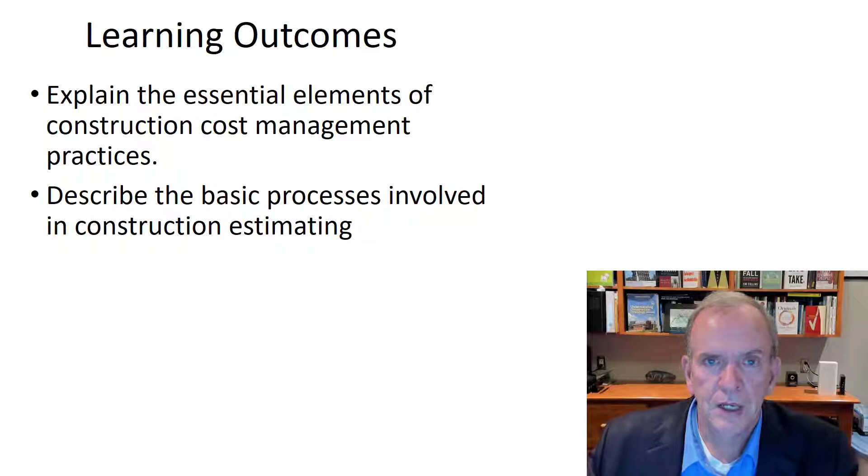Learning outcomes: today we're going to be looking at the essential elements of construction cost management. We'll look at life cycle costing and some of the processes involved in estimating. What's it about, who does it, why do we do it, and what are our concerns about doing it? So capital costs in construction, that's the costs associated with building.

A lot of construction work is development, and development requires land acquisition, which is of fundamental importance if you're going to be successful in the development industry. There's that old saying, build it and they will come. Well, if it's not in the right location, they may not come. That's why you also have the other term: location, location, location.

So we have to look at the land acquisition cost and the cost of constructing buildings. There's two kinds of things there, and deciding highest and best use. We've talked about that in an earlier class. What is the highest and best use for this particular property? If you figure that one out and then build to it, you're likely going to be very successful because you've capitalized on the best use for that particular property.

In other words, if the best use is for it to remain a forest, you leave it alone and don't buy it. If the best use is instead of it being a farm, or downtown Toronto, instead of it being a warehouse like at King and Dufferin, if the highest and best use is to renovate that warehouse into loft condominiums, or to tear it down and make it into Liberty Village, that would be a highest and best use example. So there's all of those kinds of things that go into it.

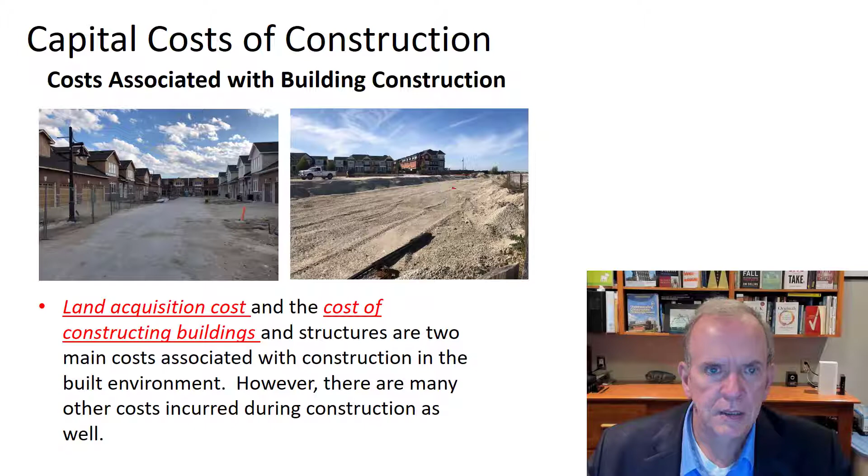Developers usually don't have to think too much about life cycle costing. You build it, you sell it, there's usually a warranty period. In new house construction, it's a 7-year warranty period under the Tarion warranty program, which is mandatory in Ontario. However, in commercial buildings and things like that, it might be a 1 or 2-year warranty.

P3 projects, private-public partnerships, often have it where you design it, build it, and maintain it for 25 or 30 years. Well, I think you're going to design it a little bit different if you're going to be maintaining it for that long.

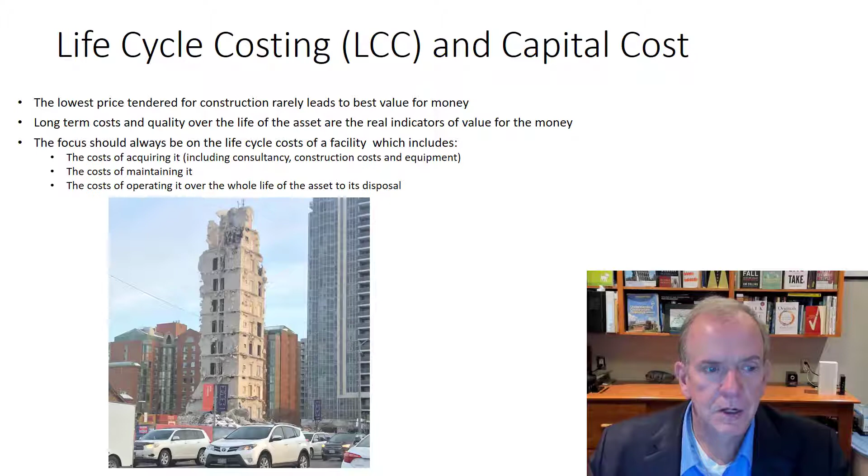So life cycle costing looks at the life cycle cost over its lifetime: the costs of acquiring it, the costs of maintaining it, and the costs of operating it over its whole life. So you're talking about build costs, maintenance costs, operational costs. You can understand that's quite a different sort of number.

Surprisingly, not too surprisingly I guess, construction costs are like this much. And the iceberg that they always say about the Titanic, it's much bigger underneath the water. That's usually how building life cycle costs work.

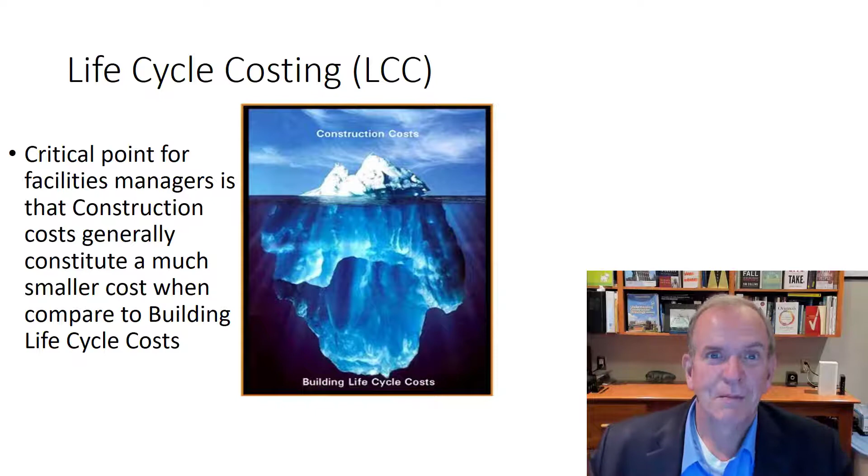In another course I talk about First Canadian Place and the Carrara marble that was falling off of it, falling like 40 floors onto the ground, very dangerous, and they had to reclad the building. It cost more to reclad the building than it cost to build the building. Of course there was inflation and everything involved, but just to give you an idea, it's a pretty hefty cost to maintain buildings.

So the capital costs: initial cost, land acquisition as mentioned, construction costs, materials, equipment, all of these line items you can see here: project management, supervision, testing and inspections, costs for regulatory authorities, permits, feasibility studies, design fees, financing costs, costs of bonds and insurance—we'll talk about that in the second lecture—and costs of equipment and furnishing for building fit-ups. There are other costs in between those too. It's a pretty large area we have to consider when constructing a project.

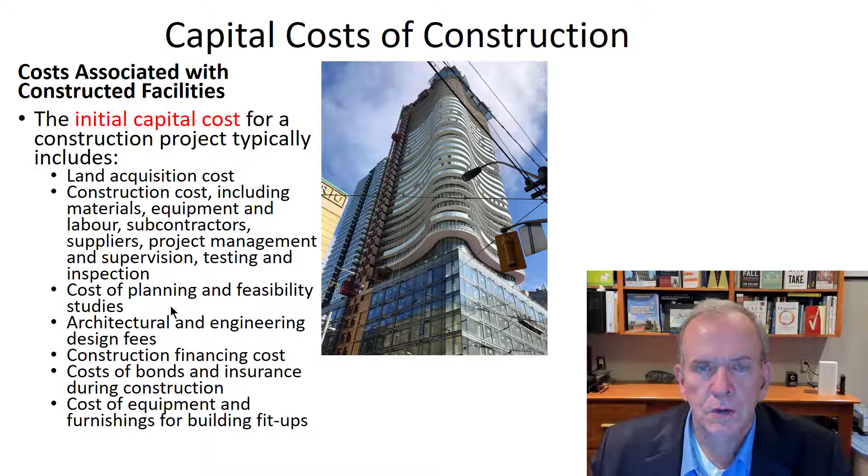Like demolition costs, I don't see demolition costs there. I could sit here and round out a few more of them pretty easily. And that's construction—there's a lot of costs involved. So you have to really look at things carefully as a developer to make sure you've got your P's and Q's in order, that you don't have any surprises, or at least none you didn't have contingency allowances for.

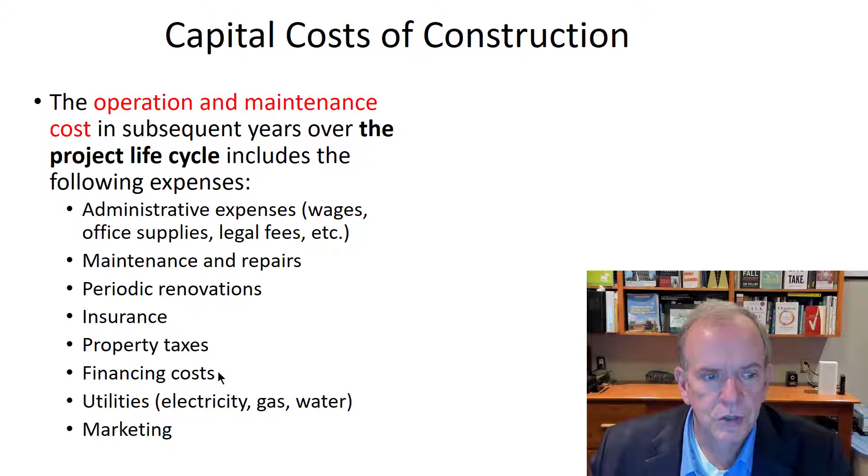For operation and maintenance, some of the line items here: periodic renovations, insurance, property tax, finance costs, utilities, marketing, and a number of others. Design professionals and construction managers realize that while construction costs may be the single largest component of the capital costs, other cost components are not insignificant.

Land acquisition, well in Toronto, land acquisition can easily be more than the building cost itself. In some cases, that's why you'll see people like my mother-in-law say, oh, they tore down this house, somebody paid $1.6 million for this house and they tore it down, are they crazy? Well, it's the property that's worth 1.6 million, not the house.

The house is actually kind of an inconvenience that it's there. So highest and best use is we get rid of this little bungalow and put up a 4,000 square foot house, and maybe it costs $300 a square foot. That would be 1.2 million for 4,000 square feet, and we paid 1.6 million for the property, so that's 1.6 plus 1.2, that's 2.8 million, and maybe we sell it for 3.4 or 3.5 million, making a tidy little profit.

And what was more expensive? In that case, the land was more expensive. So that can easily happen, with very large costs that can be involved.

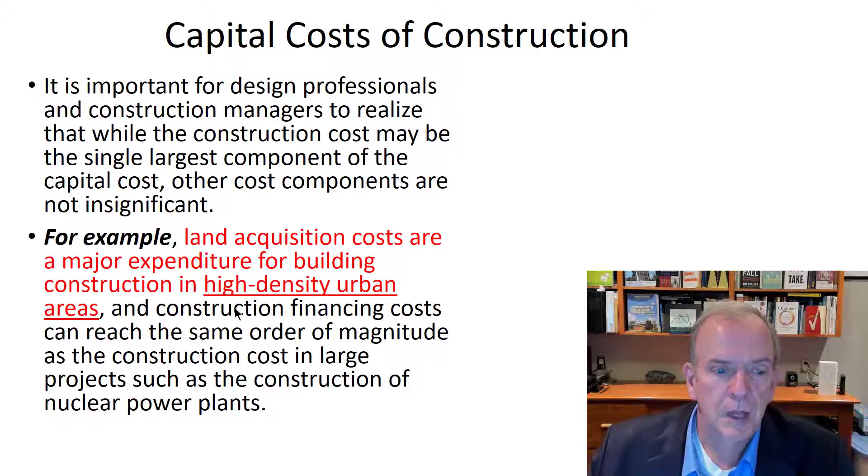Project cost management. So when we think about managing those costs, there's estimating and budgeting. Estimating is trying to figure out if this is doable and what we can do it for, or if we're bidding on a project, what it's going to cost, including our overhead and our target profit margins. Budgeting is looking at whether we can meet that budget or beat it. Then monitoring it as it's being built is trying to control the costs. There are these three levels that go in.

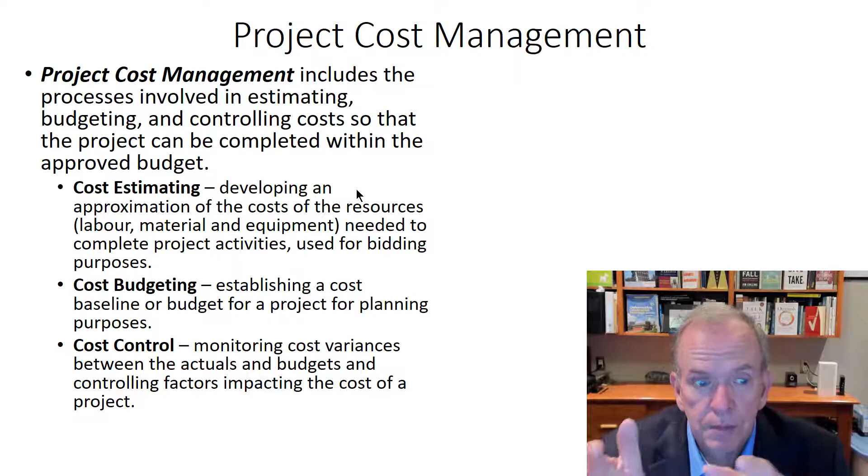Cost budgeting gives us a baseline that makes us, as we approach the project, do two things: a cost baseline and a time baseline. That would be our baseline schedule and our cost budget. And then we want to monitor both of these together as we're doing the build out for the project. That's your cost control.

And project monitoring. So we have a construction estimate that forecasts the quantities and cost of the project, and really, cost estimation - if you mess it up, how do you fix it? You're knee deep, you bought this land, you got the building halfway up, and you did a disaster on the estimate. Doesn't matter how good a project manager you are, you can't fix it. That's one of the reasons why estimating is so important.

Just to give you an idea - I'll cover this in section B - about the bidding process.

A construction estimator is the professional who prepares the cost estimates, and you'll also hear the term quantity surveyors. So you're an estimator, you're a quantity surveyor. Quantity surveyor is a designation you can go after - you can be a CIQS, a certified quantity surveyor, just like you can go after a project management designation, a PMP, project management professional. We'll talk about that in another lecture with all the different certifications and designations you can potentially go after. But quantity surveying is known as a profession.

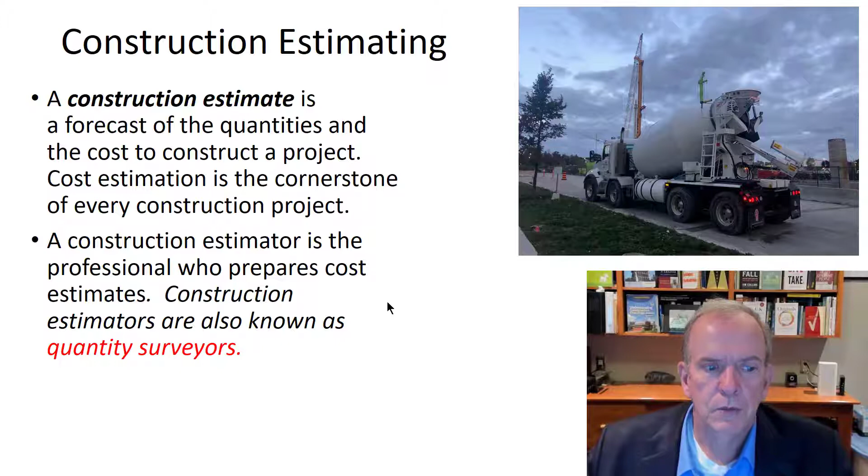Quantity takeoffs - that's where we take off all the materials we're going to use. That would be your quantity takeoffs. It's not including the labor yet. So quantity takeoffs, you're trying to take off volumes, linear footage of materials, areas of materials, and put that together with the costing of what they are.

And that's, you know what, that's not the most difficult thing to do. The most difficult part of estimating is pulling together all the labor rates, productivity rates, and build numbers for actually constructing it. There's more variation in that than in the actual material price, especially if you can get locks on material pricing for so long from your suppliers.

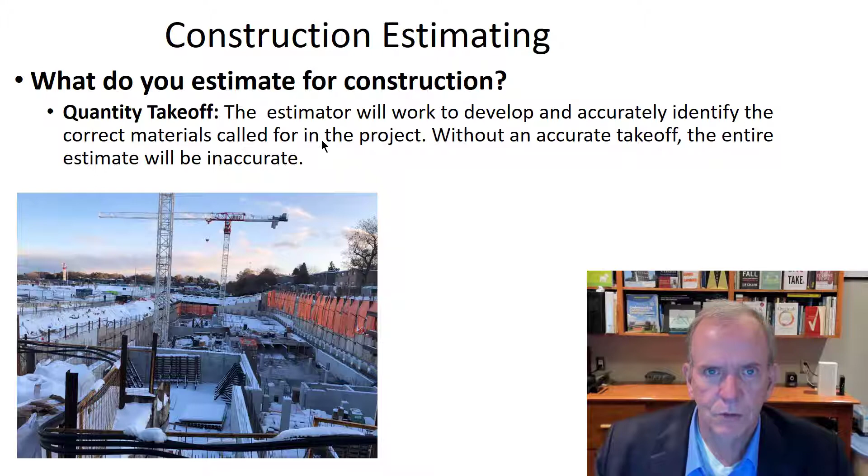So, labor hours, labor rates - you got moving targets going on. Different people work in different ways, and some are more productive than others. So you have to do those takeoffs and that estimate of hours and expected productivity, and factor the work that you're doing. Like, is the drywall for 8-foot high walls, or is it for 10-foot high walls? 10 foot's going to be more difficult than 8 foot, just because of the little bit extra height and reach that's required.

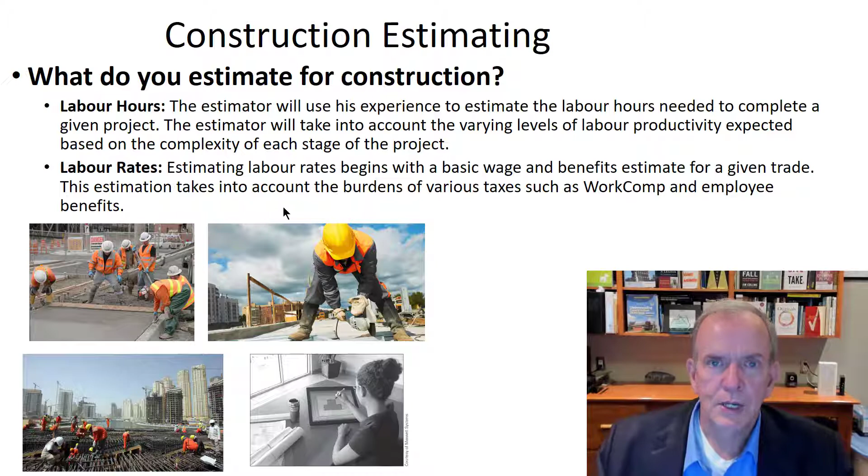So we think about material pricing. Sometimes we have issues with fluctuations in the market and pricing. Like this summer, pressure treated lumber was very difficult to get because everybody wanted to build decks, and there were shortages of pressure treated lumber, and the prices went up through the roof. Those are good examples of where you have variation and variability in the pricing of materials, and that can be problematic. You could have a trade war, and all of a sudden the price of steel goes through the roof for rebar going into concrete.

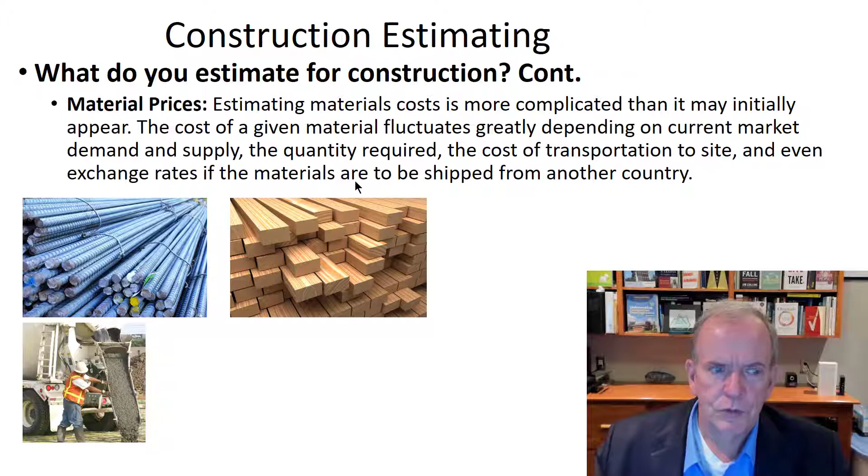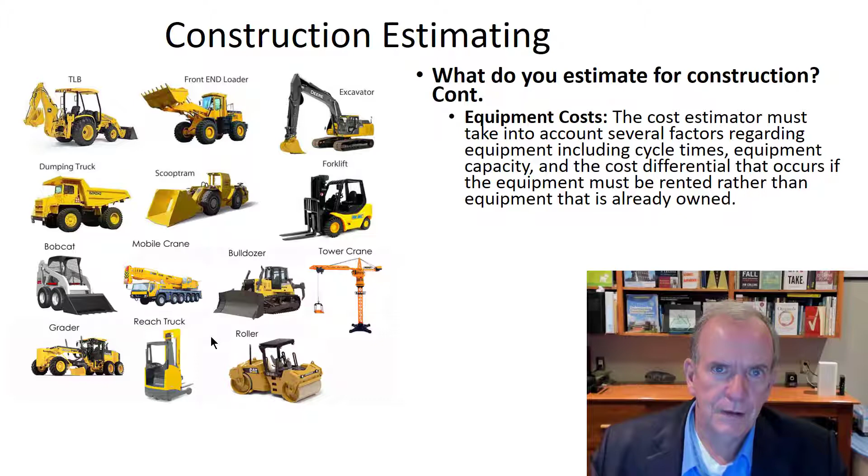We also have to estimate equipment costs, figuring out what equipment we're going to need and making sure we don't miss anything, and do we have the right amount? Should we have more than one piece of these particular pieces of equipment? So if we're going to go with 2 cranes, there's extra costs in having 2 cranes, but there's probably also extra savings. If it makes sense from a business perspective to have 2 cranes, then that's what you should do.

Those are the kind of thought processes that have to go through the estimating side. That's where it gets more complicated. The estimating is figuring out how it fits in with the methodologies that's going to be used and the cost implications of different methodologies, and that can make or break you at being successful on a project. And then that has to integrate with the budgeting, which has to integrate with the site work, so there is this integration that has to occur.

Whereas project management has a lot of iterations, once you do your estimate, you're kind of stuck with that price when you start the project. It's not like you can reiterate the estimate. Now, you can look for budget savings in different places, but it's much more difficult to do. And you should do that always, but sometimes when you miss something, that puts you in a big hole.

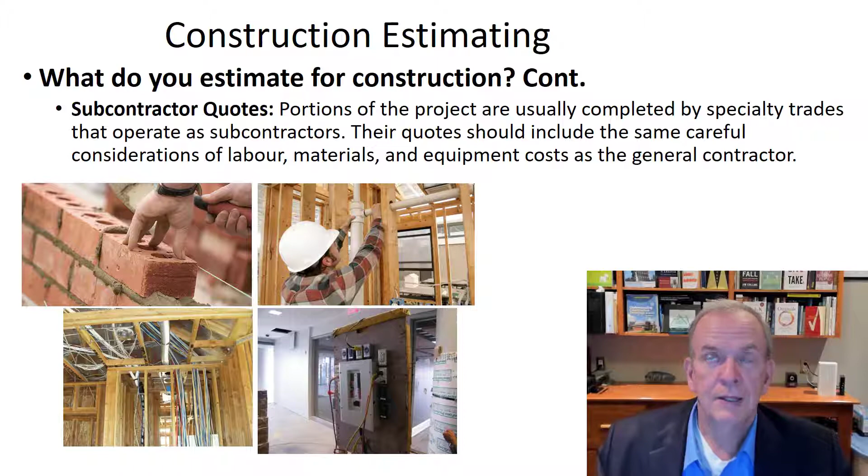So you have to have subcontractor quotes. You have to allow for things that are non-value added but you need them, like temporary power. You need to make sure that it's easily accessible. Task lighting and area lighting, and who's paying for that, and how's that costed out, but it needs to be part and parcel. You've got to have task lighting for when you're doing the work, because you don't have permanent lighting in place yet, and so forth.

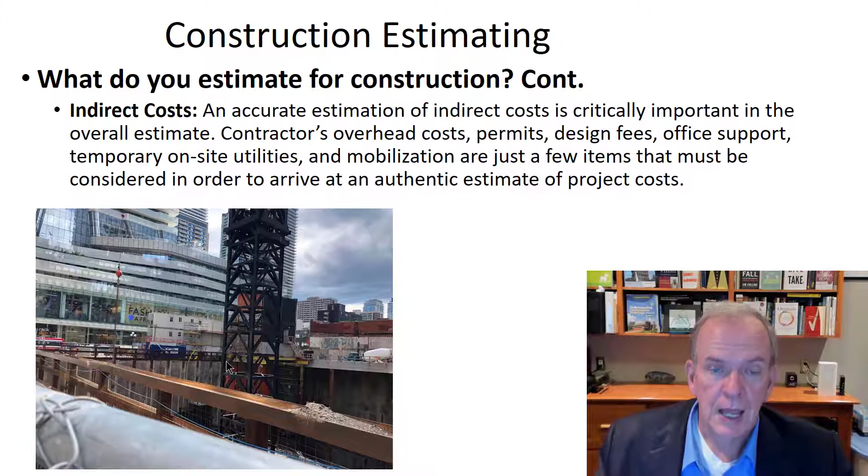So it's important for contractors, because if you don't do that, either you're going to be too high or too low. That's the thing with estimating - you're either too high or too low. And then when you get it, you're wondering which one you are. You're wondering if you were too low. You generally, when you get a project, start to wonder, was I too low on this one? It's a little bit nerve-wracking when you do that, especially when it's your own business.

You really don't know if you were too high until you actually do the project, and then you're going to find out. For owners, the estimate - they usually have preliminary estimates that they've worked on, so they have an idea of what they're expecting the budget to be. At least professional owners do. Homeowners generally have no idea.

You give them a price and they're having a heart attack in front of you. They think everything's going to be for free, in my experience. So usually I try to give them some indication before I go to too much trouble pulling out a detailed estimate, because then I at least get some feedback from them. If that's crazy out of line, then I don't waste my time. But when you're dealing on larger projects, it's much easier because they're professional and they know how that goes, and they have a budget for it.

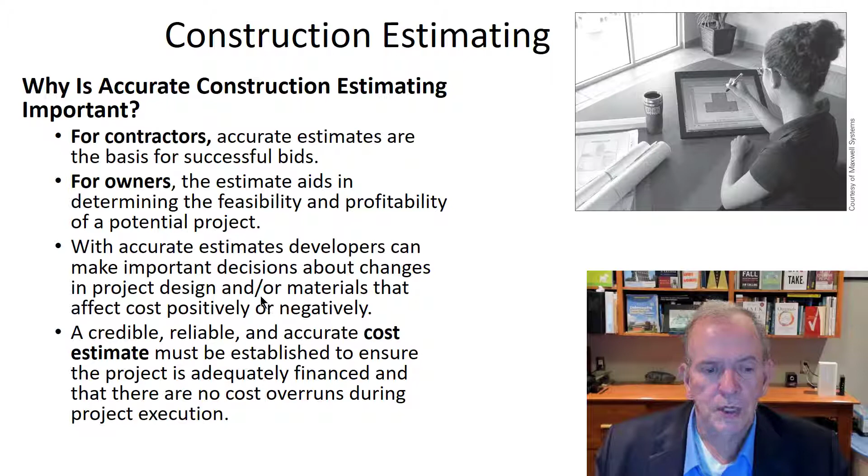A credible, reliable, accurate cost estimate needs to be established, and you need to make sure that the project's adequately financed and that there's no cost overruns during project execution. So you want to make sure that it's carefully managed and monitored.

So really it's the process of determining the expected quantities and costs, what materials do you need, how much, and the labor costs. How much is the labor going to be to produce this, and the equipment costs. So usually what you're doing is pulling together a bunch of other costing, like your subcontractors, letting them come up with what's the electrical cost on this, what's the plumbing cost, what's the mechanical cost.

In larger companies, they have estimating teams that have a budget that they more or less see for what this is going to be, and they base that on historical experience. They base that on square footage costs using industry-wide collected data, RS Means, etc. They produce quantity pricing and labor pricing for different jurisdictions in Canada and North America, and that allows them to come up with ballpark estimates. So then if somebody's out of line with it, you can dig deeper. That's what typically happens.

And really it's the product of this whole process of going through those stages of pulling together different estimates, verifying the estimates, doing, if you're self-performing, your own costing, putting in your management fees, counting your overhead, and putting your target profit amounts on top.

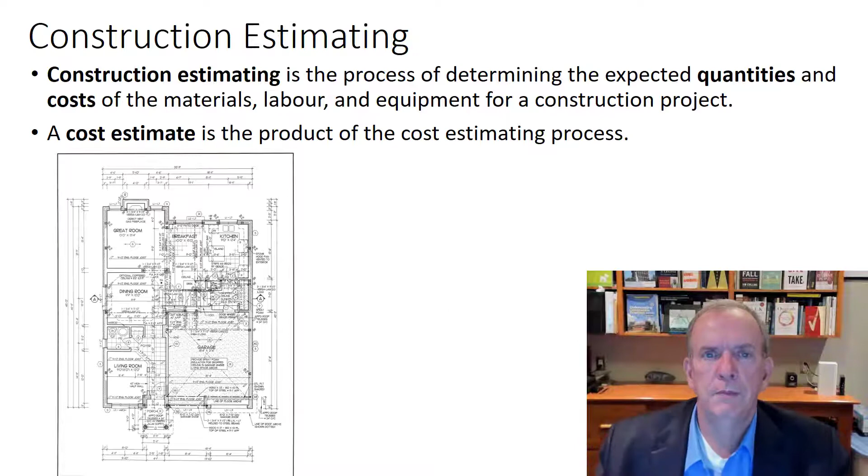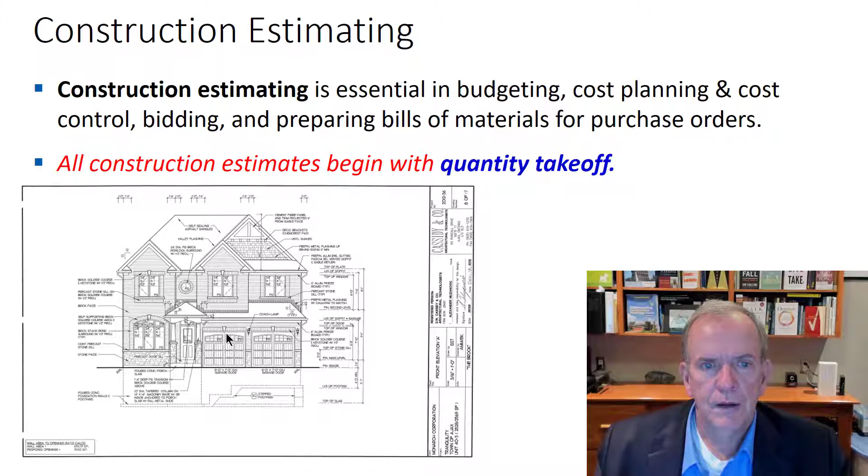So as we were saying, they all start with a quantity takeoff, and that's taking off the materials. The quantity takeoffs involve detailed measurements of quantities, understanding linear footage, areas, volumes.

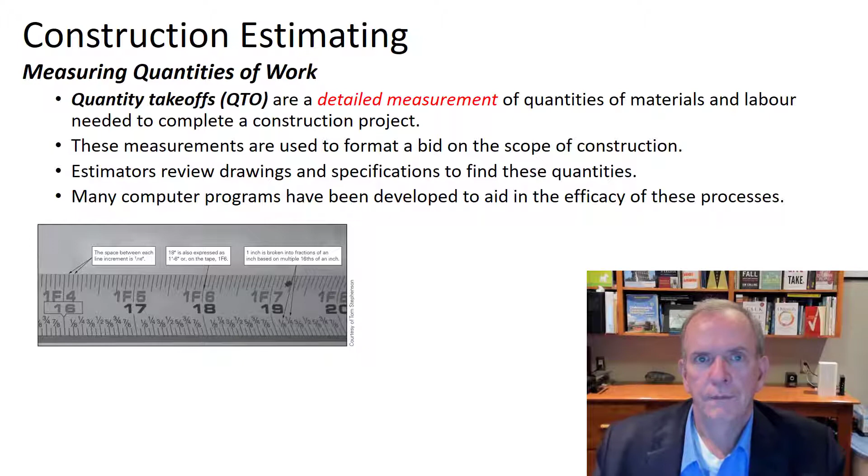The math is not that complicated, but understanding what's in the drawings, properly interpreting the drawings, not missing items, is where we run into a lot of problems. I think some estimators tend to think it's like this heavy-duty math. I've never thought of it as heavy-duty math. I've just thought of it as very detailed math, and you have to be very analytical with it, but it's not rocket science. Length times width times height.

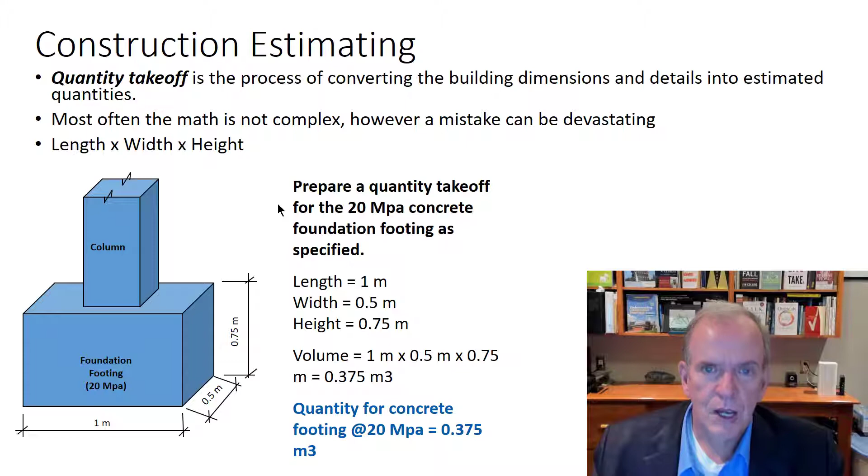There you go, length times width times height. That's your volumes for concrete, and you just have to figure it out. You just don't want to miss footings in your drawings. You don't want to miscount linear footage. That's usually where you run into these errors, is putting it together. So you usually want to have a system or process for doing your takeoffs that facilitates you not missing stuff. And then there's all kinds of checklists that are used by estimators to ensure that they don't miss major items.

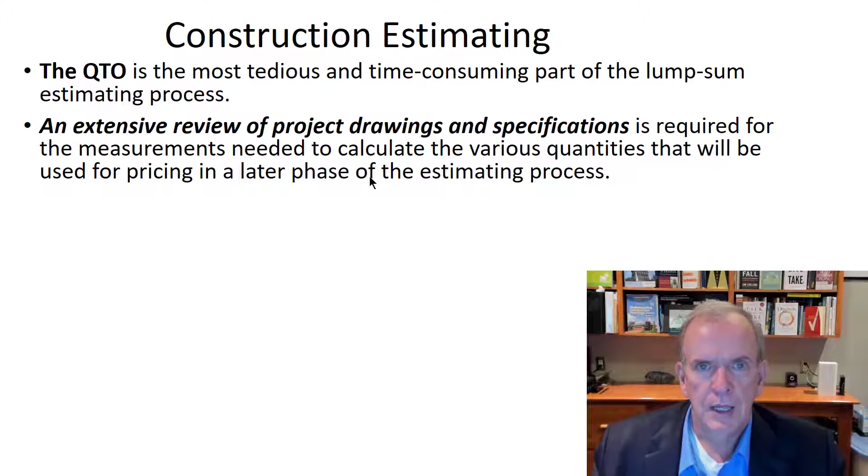So quantity takeoff is a tedious, time-consuming part of lump sum bidding, because you've got to be very careful. You've got to really review the specifications. You've got to review the drawings. One line in the specification could mean that you're estimating the wrong product. That's where you run into problems. You've got the wrong product, and you've got a quote on the wrong product, and the difference between one product and another could be quite large.

So we have to go through the project drawings, the project specifications, and all the project reports, and make sure that we have a good, complete understanding of the project, what the scope is. You've got to have clarity on the scope if you're going to price the scope. How can you price something if you don't know what it is, right? So that's what you're trying to do.

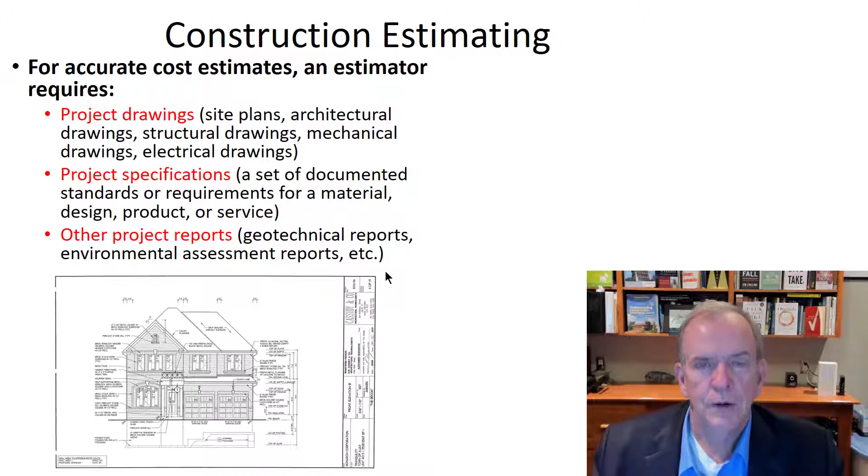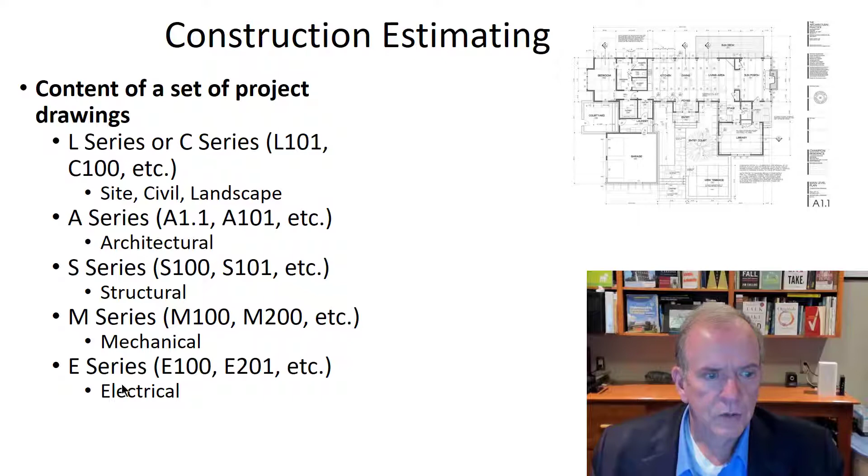And of course, in drawings, when we get into commercial projects, there's all kinds of different numberings for drawings, whether it's site work, architectural, structural, mechanical, electrical, and you can sort of see the designation by the letter at the beginning, giving you an understanding of whether it's landscaping or site, civil, architectural, structural, etc., and the numbering system, page numbering systems.

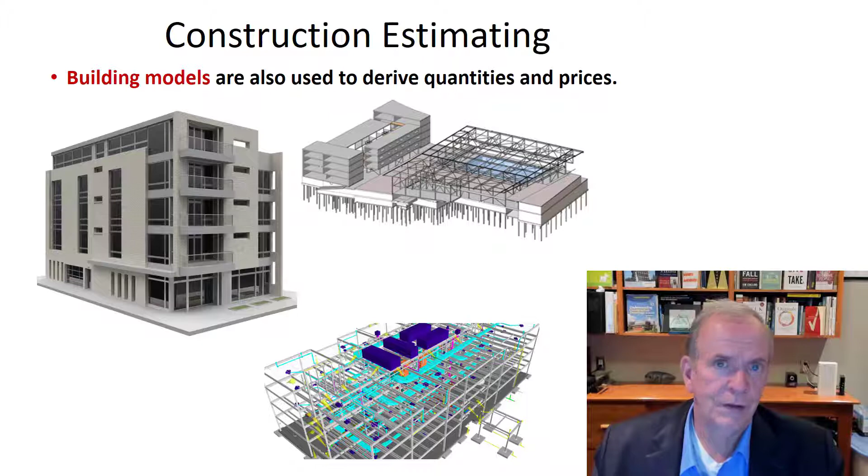Of course, we can have BIM models, 3D models, and more we're starting to have quantity takeoffs from the models, so you can get volumes and areas that are much more accurate to be taken from the models when the models are done right. And that's one of the issues as we evolve with BIM, getting the models done correctly, and having a system to that too, just like we have with our 50 division format and 16 division format and specifications.

So there's different types of estimates. The rough cost, you're trying to figure out, well, if you're a developer, does this make sense? How much per square foot is it going to cost us to build this condominium, and how much are we going to be able to sell it per square foot or square meter? Is that difference going to allow us to make our profit targets? And what's the risk level of something changing in the mix?

Probably construction costs are a little more understood than market conditions with what you're able to sell the condominium units for. But even construction costs have been misaligned and misjudged, because maybe the project, instead of taking 3 years to get built, takes 5 years, and inflation has come into it, and maybe there was a down market. That could be problematic in the condominium markets as well.

So detailed estimates, now you're really getting into the details, and you're using it for bidding. There's basically bid drawings that were put out in a tendering process. You're going through the bidding process, and you're in the pursuit of this work, as they call it.

It's interesting, some companies, when I was in Calgary, I thought it was really kind of nice the way they would do it. So Bird, when they would win a bid, they would ring a bell, and everybody in the office would cheer and celebrate that they won a bid. I thought that was a very interesting way of getting the culture to work together more collaboratively and to appreciate the wins when they come, because you don't win every project. And if you do win every project, you got to start thinking, why am I winning every project?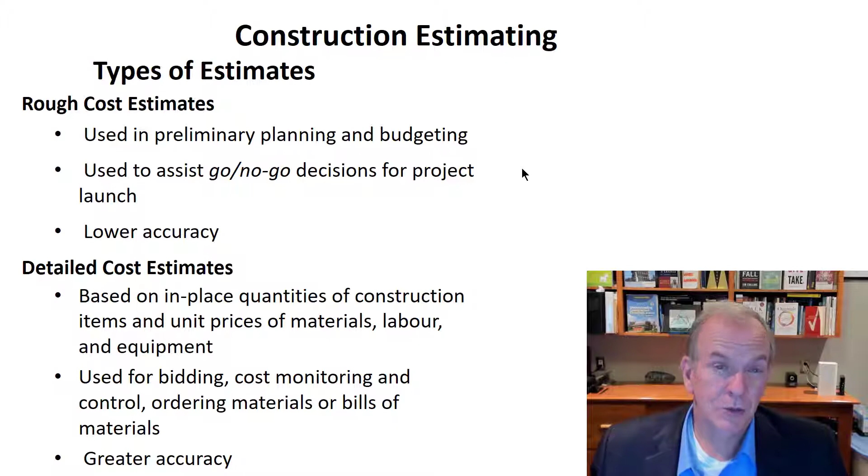So estimating is vitally important for those reasons. We have estimates for contractors and subs. We normally prepare our estimates for the bids, and as I said, the GC is going to collect bids from the subcontractors, collate them, figure out which ones are pre-qualified, use their bids, and put that into their bid submission.

And estimates for owners - very often that's helping them decide what's this new building at George Brown College going to cost. Before they even get bids on it, they want to have a budget, because they've got to see, can we do this? You don't want to do up a full set of detailed drawings and specifications put out for bid, and the cost of the waterfront campus comes in at $160 million, and you say we only budgeted $60 million. Well, we can't do this, right?

Not that that doesn't sometimes happen, but if you did a good preliminary estimate and the owner has that, using their own quantity surveyors - you can hire consultants to prepare that for you - that gives you a realistic costing of what it should be. So if the quantity surveyor gave you an estimate of 150 million and it comes in at 160, okay, it's 10 million more, but it's in the ballpark. Owners still wouldn't be happy with it being 10 million more, but that's the way it goes sometimes.

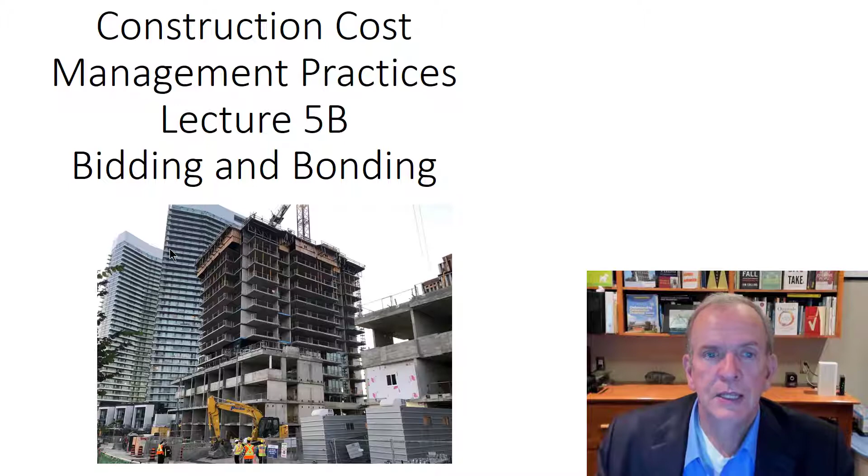So that's what I wanted to cover in lecture 5A, and we'll be moving on to lecture 5B, which is the bidding and bonding process. I hope you've enjoyed lecture 5A and the process of estimating. It is a vital part of the construction industry.

It really is important. If you want to sink a project, throw in a lousy bid, and I'm guaranteeing you're going to sink the project. You'll probably get the project too - that's the other problem if you're pre-qualified. But that's what we're going to be talking about in the next one: the pursuit of the project, the bidding process, and the bonding process.